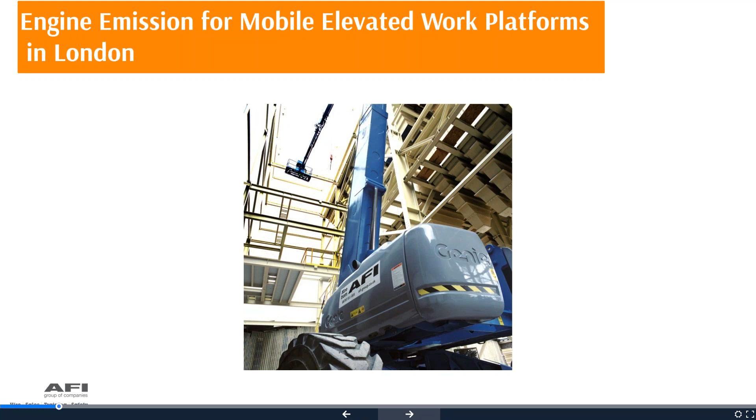So looking at the agenda, we're going to cover NRMM. We're going to look at the scale of the problem, look at some classifications of engines and how you can understand these things. A little bit about breathing, a bit of toxicity, looking at how they affect the body, etc. A little bit of history, looking back at why these things have happened and how it's come to where we are now.

We'll look at NRMM and their website, what's now and in the future, and more importantly how we're going to read an engine plate, because if you are on site in London, certainly in some of the central activity zones or Canary Wharf, you are going to have inspectors looking at your engine plates. And of course there are some machines that we can get an exemption on, so just be mindful of those things too.

So air pollution is one of the most significant challenges facing the City of London. As a major city, London is now in breach of European legal limits for nitrogen dioxide, and many areas are now exceeding safe limits for particulate matter. These limits are set by the World Health Organization. I'll explain NOx and particulate matter later on.

So in order to address this, the Mayor of London and the previous Mayor, Boris Johnson, now Sadiq Khan, have introduced new measures to tackle and reduce emissions from road transport, particularly diesel vehicles, including an expansion of the ultra-low emission zone. You might have heard on the national news last night that the Mayor has now introduced new requirements for vehicles entering the centre of London. This comes with an additional charge imposed on the higher polluting vehicles. So it's clearly going to affect older road-going vehicles and businesses, and equally people in their cars, buses and lorries.

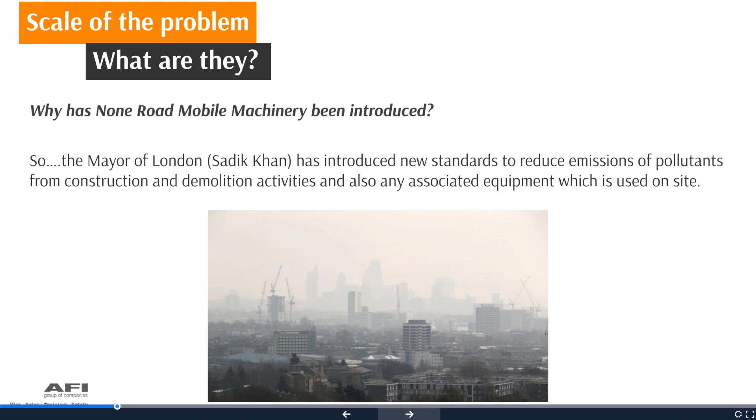So NRMM, non-road mobile machinery. It's defined as any mobile machine, item of transportable industrial equipment or vehicle, with or without bodywork, that is not intended for carrying passengers or goods on the road, and is installed with a combustion engine, either an internal spark ignition (SI) engine, such as a petrol engine, or a compression ignition (CI) engine, for a diesel engine.

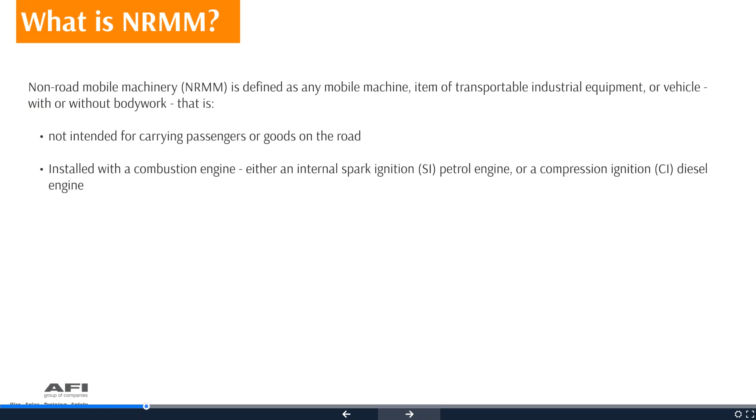So interestingly, this also includes equipment such as excavators, bulldozers, cranes and MEWPs, but these are all dependent on how they're used, and they contribute greatly to air pollution. What they emit is carbon oxides, hydrocarbons, nitrogen oxides and particulate matter. So essentially the EU policy's objective is to progressively reduce the emissions and to phase out all polluting equipment. I'll cover some more examples a little bit later, some that you might not actually realise as well.

So in terms of the engines, they're split into various categories. SI would be a petrol engine and CI would be compression ignition for a diesel engine. But then they're further classified according to the engine's power rating. These categories are then given limits for their emissions output, and they're commonly known as stages. The regulations then tighten the permissible levels of emissions by introducing different dates of compliance for each category and stage, and the rules also distinguish whether the engine is constant or variable speed. So some things to be mindful of.

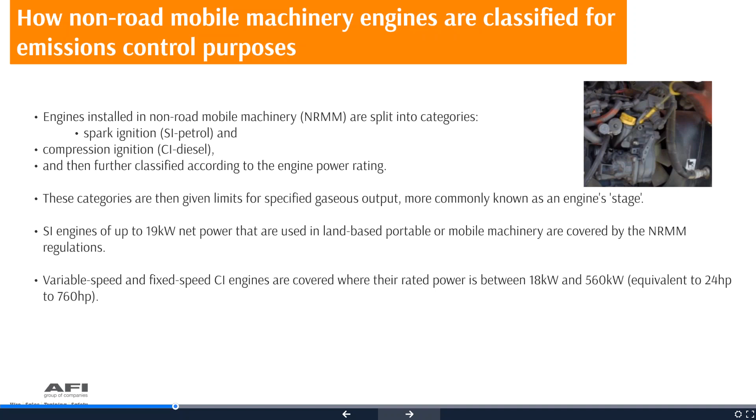So pollution, I think we're all kind of aware of the dangers. Sometimes we don't realise that in certain areas it's certainly worse than others. In Britain alone, pollution is linked to some 40,000 deaths per year. Now, that's every type of pollution. But nearly 9,500 people are thought to die each year in London due to long-term exposure to air pollution. And that's more than twice as many as previously thought.

Nitrogen oxides, or NOx, are poisonous gases derived from nitrogen and oxygen which have been combusted under high pressure and temperatures. So all combustion processes produce oxides of nitrogen. In London, road transport and heating systems are generally the main sources of NOx emissions. NOx is primarily made up of two pollutants, nitric oxide and nitrogen dioxide. Nitrogen dioxide is the most concerning due to its impact on health. Most of the time nitric oxide converts into NO2 in air.

So essentially the important part is to control the emissions, as they can have a direct and indirect effect on human health. Directly, NO2 is known to cause breathing problems, headaches, chronic reduced lung function, eye irritation, loss of appetite, and even corroded teeth. Indirectly, it can affect humans by damaging the ecosystem we rely on, for example water and land, by harming animals and plants.

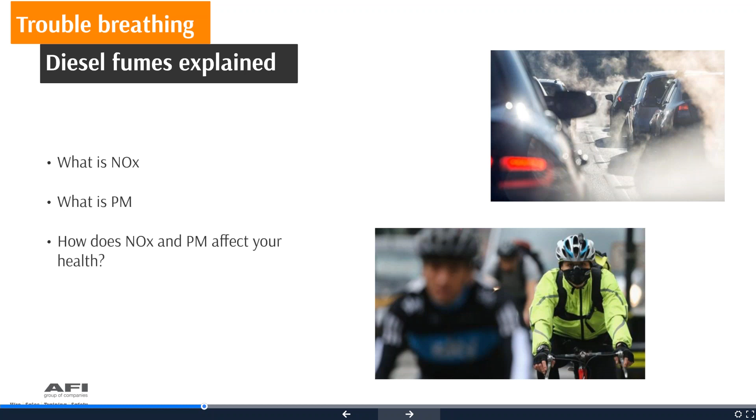So let's look back a little bit of history. Going back well before I was born, 1952, worries about pollution reached a peak with the Great Smog of London. Some of you might remember it, the big smoke. This was a severe air pollution event that affected the British capital of London in December 1952.

A really cold period of weather combined with an anticyclone and windless conditions collected airborne pollutants, mostly from coal and various things like that, forming a thick layer of smog over the city. It lasted for 4 days and then dispersed quickly when the weather changed - the wind got up and blew it away. It caused major disruption by reducing visibility, even penetrating indoor areas, and was far more severe than previous smog events experienced.

Government medical reports in the following week estimated up until the 8th of December, so some 4 or 5 days, that 4,000 people had died as a direct result of the smog, and 100,000 more were made ill, affecting the human respiratory tract. However, more recent research suggests the total number of fatalities was much higher, around about 12,000 people. So 4 years later, 1956, Parliament passed the Clean Air Act to tackle smoke and sulphur dioxide.

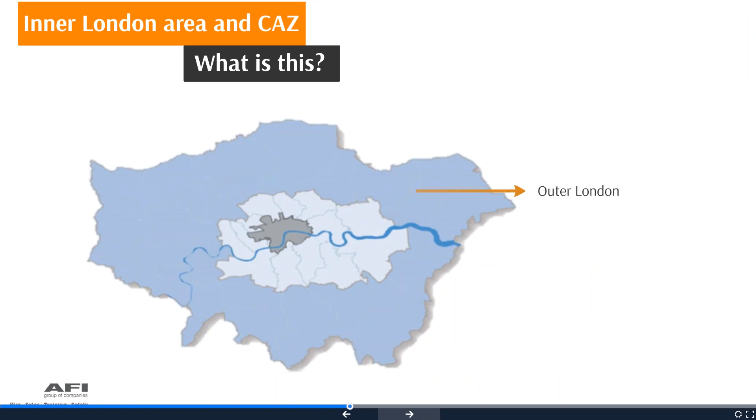Just to give you a bit of context of the area, as you can see there, we've got the Outer London area, the Central Activity Zone, and the Inner London area. The only thing not shown on that one would be Canary Wharf, which would be to the right of the Central Activity Zone. But it's just showing you a picture of that anyway, so hopefully that gives you a bit of scope and context.

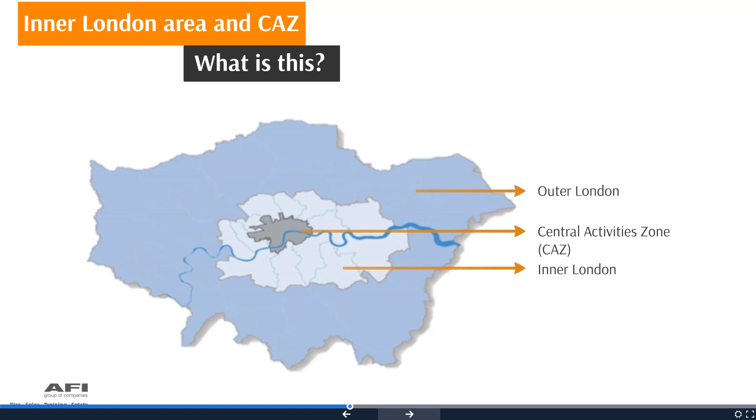So essentially now we're talking about anything in the white or the central dark and grey bit. But like anything, it's going to expand outwards.

So what is required now? From the 1st of September 2015, any major development site - and to quantify what constitutes a major development site - these are defined in the London Plan as residential developments of 10 dwellings or more, or where the number is not given, half a hectare or more, and for all other uses, a floor space of 1,000 square metres or a site area of 1 hectare or more.

Now the site itself, the area, is directly involved with some aspect of that development, and floor space is defined as the sum of floor area with the building measured externally to the external wall faces at each level. So basements, car parks, rooftop plant rooms, the caretaker's flats - anything should be included in the floor space figure.

So as you can see there, it says NRMM used on the site of any major development within Greater London will be required to meet stage 3A of the EU directive. Any development site, similar sort of thing, any non-road mobile machine used on any site within a central activity zone or Canary Wharf will be required to meet stage 3B of the EU directive. So already we've got these requirements, and you should be meeting these at this moment in time.

What's in store for the future? The goalposts are naturally going to change, and it would be remiss of me not to say that you'll need to have your ducks in a row when 2020 arrives, as any honeymoon period they've had is over. From the 1st of September, any development site will require to meet stage 3B, and any within Greater London, and non-road mobile machine used on any site within a central activity zone or Canary Wharf will be required to meet stage 4 of the EU directive. So already they've moved the goalpost one up, and that's what's coming.

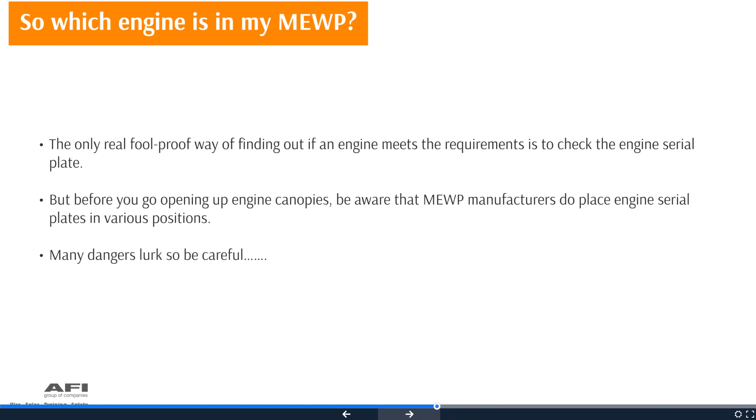So before we go doing that, we need to be aware that MEWP manufacturers do place these serial plates in various positions, and there are dangers lurking, as I'm sure you'll be aware. So you've got to be careful.

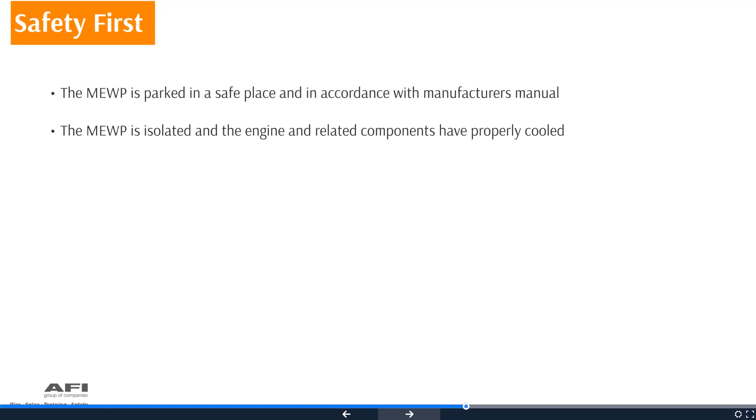This list is not exhaustive, but clearly we've got to make sure it's parked in a safe place, in accordance with the manufacturer's manual. The engine has been isolated, or any power sources have been isolated - I'm saying that because some machines have dual power, so you may have isolated one but the other may still be going - and of course making sure it's properly cooled.

Any parking brakes are engaged. Most MEWPs will tend to brake automatically, however that's not always the case - it may be a truck-mounted MEWP or a van-mounted MEWP, so make sure they're engaged correctly. Any interlocks have been applied, which are either safety or operational interlocks. All emergency stops have been pushed in, and any operating keys have been removed.

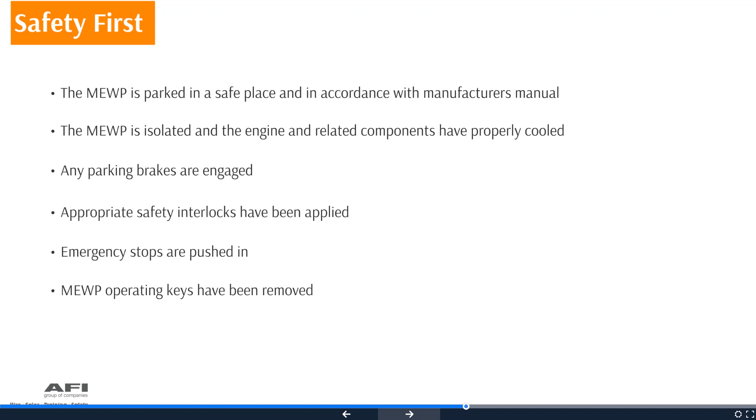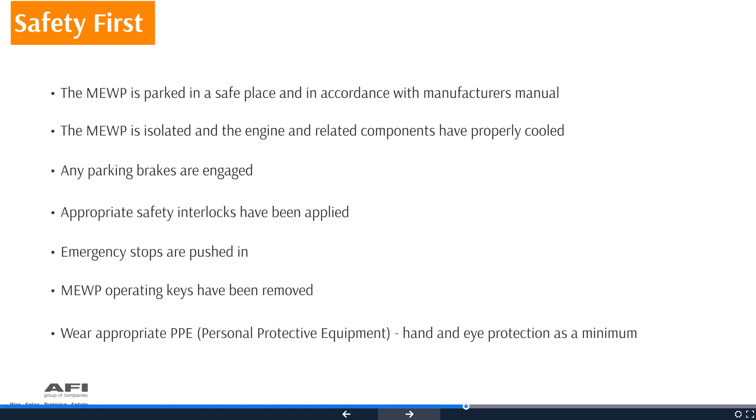And then, of course, you're going to have to wear the appropriate personal protective equipment. We'd be expecting hand and eye protection as a minimum, but that's necessarily going to mean speaking to your safety teams and making sure you're following on-site procedures. So that's my legal thing out of the way straight away - make sure I cover myself there.

Okay, so manufacturers naturally - we've checked our engine over, we've parked our machine correctly - what do we do then? Manufacturers naturally have their own way of meeting the criteria. So many different types of engine: Kubota, Caterpillar, Deutz, all different sorts of engines out there. If we go back a step, these engine serial numbers will be in their technical product information, and there's an example of one there, giving an indication of the engine code structure that you would see on the actual engine.

Now, engines manufactured in compliance with EU engine emissions must be marked with certain information. These markings are commonly located on either an emissions label or an emissions plate. The emissions label can be in different places - it can be on the engine, you can actually find them, sometimes they're in the cab of the vehicle, depending on the type of machine you've got. The engine should be marked by any durable method, so normally it's like a printed plate, but not necessarily.

Just a printed plate, riveted onto some part of the engine, and this is going to include the name of the engine manufacturer and the type approval number. You should familiarise yourself with the location of the engine plate on the MEWP, as this will make it easier and quicker when requested to find it during an inspection.

So you can see an example of the structure of an engine code there. Number 1, is it constant or variable speed? Number 2, what's the emission class? Number 3, EGR - exhaust gas recirculation - so it's telling you if you've got some. It's also talking about some of them having DPF or filters and such.

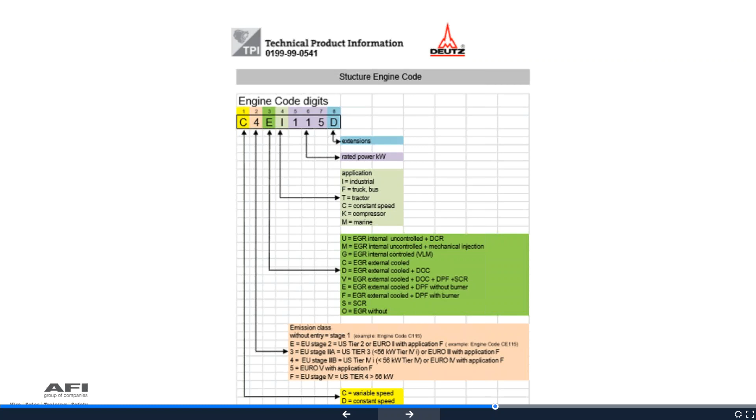Number 4 is the application of the machine. Numbers 5, 6 and 7 give an indication of the rated power in kilowatts, and number 8 is some type of extension. You don't need to worry about all of these, but there are some things that will be very important to you shortly.

There is one key digit in the approval number that provides evidence of the emissions level to which the engine was manufactured, and this is generally the method by which surveillance authorities will check the engine. It's explicit evidence telling you when the engine was manufactured, and this is where they will pull up, ask you to open the engine canopy, and find that digit. There's then a second digit that can be used to identify whether the engine is type approved for variable or constant speed operation.

This photo was taken from a JLG boom machine and shows the location of the power rating and the E1 number. You can see the E1 number straight in the middle, and the power rating up on the top left. That particular machine is 46 kilowatts with a horsepower of 62.

From these numbers, we can see the engine has a power rating of 46, so we'll need to comply with the local LEZ. The E1 number shows the engine is rated as category 3A, a variable speed engine, which complies with the GLA NRMM except for the Central Activity Zone and Canary Wharf. So we'd be able to take this in the Greater London area, but not in the Central Activity Zone or Canary Wharf.

The second digit is important because constant speed engine regulations in the EU are currently limited to stage 3A. Stage 3B and stage 4 constant speed engines do not yet exist. This is technology that will be moving forward.

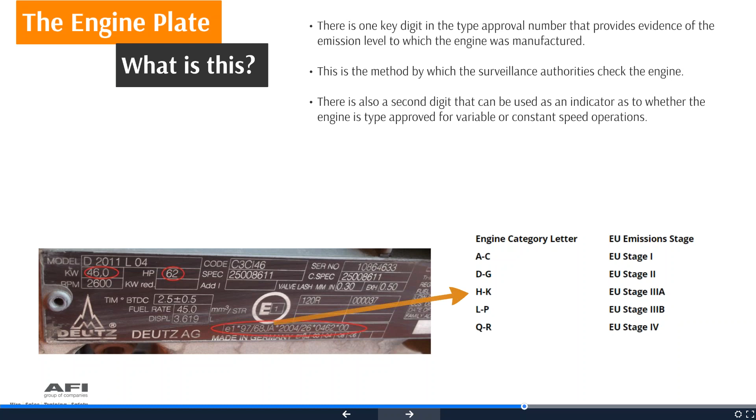In terms of the power rating, you can see it there, and if you're looking at all that thinking 'where am I going to look here' - importantly, if you look at the red line at the very bottom, you can see the letter J. If we take what I mentioned earlier, you can see it's between H and K - it's a stage 3A machine. Hopefully you've got that and understand it.

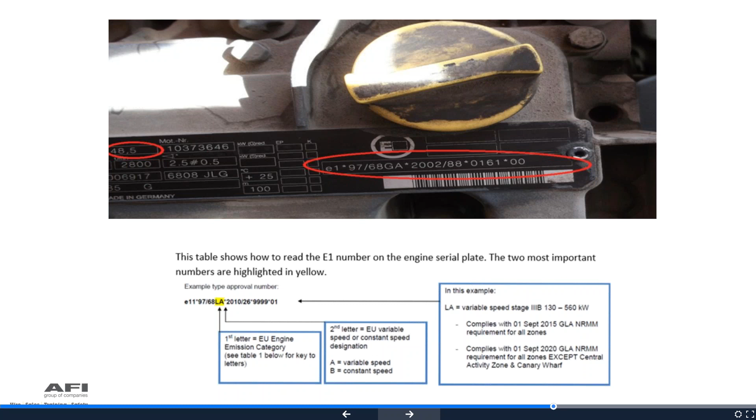When you get onto the website I showed you earlier, there's a common list of things that are preferred - for example, the machinery manufacturer, the engine manufacturer, the engine details. It's limited, so it cannot be in the future, and should be the year of the engine manufacturer, not the year of the vehicle manufacturer, which can actually be different. Engines can be made well before the vehicle is made. So if you're unsure, the engine plate would then provide you this.

The engine power is recorded in kilowatts, and the plant ID is an entry for use by the site, so they can keep track of what machines have been entered onto the system. Generally it will be used by inspecting officers when checking the register against what is on site. In our instance, from a MEWP rental company, it will be a unique fleet number.

But if you had a wheeled excavator on site, it could be the license plate on the back of the vehicle. The engine EU type approval number, as I mentioned earlier, is found on the engine plate, and as mentioned, it is the only really reliable definition of what stage the engine complies with. You must fill that in without any spaces, and the example one that I've shown you there should only act as a guide.

Occasionally, the engine number will have been incorrectly printed, or an engine may not have one. So it could be, for example, an agricultural machine. The system will accept whatever you enter into the form, but entries that do not appear valid will then be flagged, and you are then going to have to give further information.

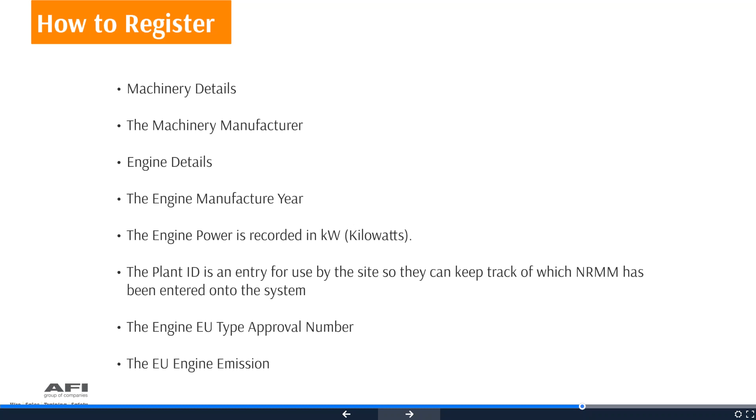So there are some machines that are exempt, and in summary, generally speaking, machines with engines that have a net power between 37 kilowatts and 560 kilowatts will be required to meet the standard. However, there are MEWPs fitted with an engine which is lower than this, and therefore will not be affected. So anything that's got 37 kilowatts or below is going to be exempt. You can see with modern buildings being designed taller, they're going to rely on larger equipment. So some MEWPs will fall into the category above 37 kilowatts.

Now you can see there, any model of MEWP which currently has a stage 3A or 3B engine available. A MEWP which is in limited supply. There are some kit out there that you're not going to get. There's no other piece of equipment in the industry that will do it. So that will be a limited type of machine.

Or equally, a MEWP which is used intermittently, or for up to 30 days. So you might use it every now and again. These are machines that are typically used for up to 30 days. So if you've got a machine on site for 10 days, or 5 days could be a typical hire, and the machine's off hired, you may have a reason for exemption.

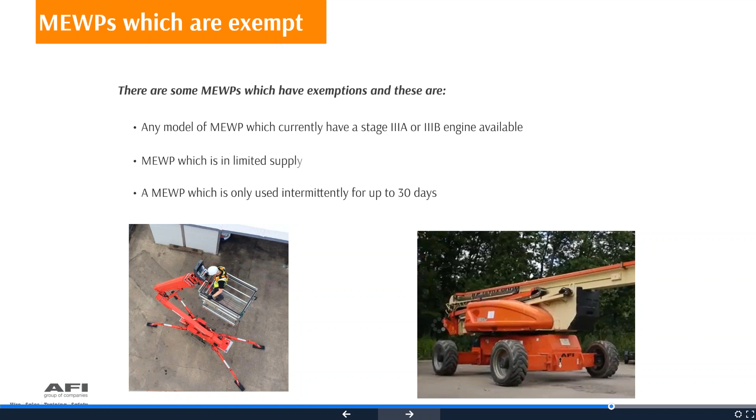What if your machine doesn't meet the standards? There are a number of options available to comply with the NRMM policy. You could reorganize your fleet. We've had to do this; clearly we've been on this for a while. So only the equipment that's in London would then be meeting the requirements.

You could replace equipment with new or second-hand equipment which will meet the policy. Retrofit abatement technologies, putting different types of retrofitting on the machines. You could re-engine. If you re-engine, you've got to be mindful of the type of engine that you re-engine with, or if not, like I said, you can apply for exemptions.

So key messages are potentially that there is not currently sufficient quantity of compliant MEWPs in the UK supply chain for this task. However, it meets the next best available EU stages. So that's a key message out there. Retrofit may be unviable; you may not be able to fit it. When we think of retrofitting equipment, sometimes these machines were not designed to be retrofitted. And sometimes you may find that you actually get a higher engine emission standard because of this.

The most common method of retrofitting involves the installation of a diesel particulate filter, sometimes known as a DPF, or a catalytic converter to the exhaust system of the equipment. All diesel engines are potentially suitable for retrofit, and this would mitigate particulate emissions, but space within the engine compartment and costs may be limiting factors. There may also be several main exhaust treatment technologies available to retrofit, and selection is normally based on the scale of reduction required and the available budget. So you've got to be mindful that there are issues there.

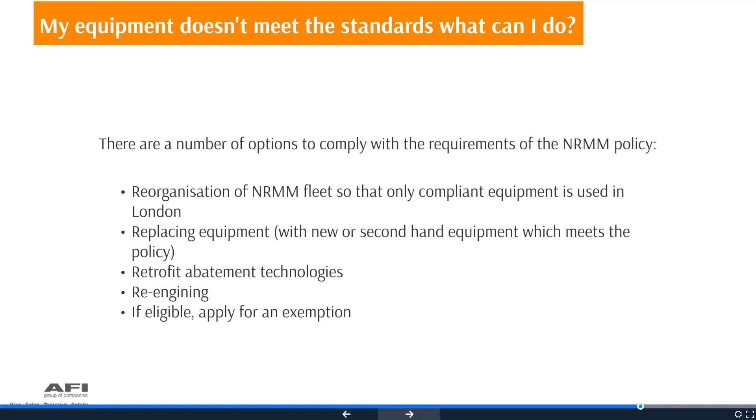So to regenerate the DPF, this would need more fuel, resulting in increased daily emissions. So essentially you're chucking more fuel into the machine to try and get the exhaust temperatures hot enough to get the filter to work. So it's kind of chicken and egg there. Also, some of the very low duty cycles and exhaust gas temperatures that we experience on the smaller MEWPs will not meet these requirements without having a bespoke solution created. So just be mindful of that.

So what IPAF did, the International Powered Access Federation UK Country Council, recognised that we had an issue on this coming, and they engaged with UK members to draw up a viability exemption request for MEWPs to ensure that MEWPs are available for construction projects. Now this is available from the IPAF website.

So as you can see, there's various things in there. You're going to put in your machine type, the manufacturer, the engine manufacturer, the year it was made, plant ID, as I mentioned earlier, like a company hire name, unique fleet number, the engine EU type approval number, what the power is, if there's a retrofit available, the EU emission stage, and then the level of exemptions already filled in there for your viability. You would put that together and send that out to NRMM to see if they would exempt the machine from use.

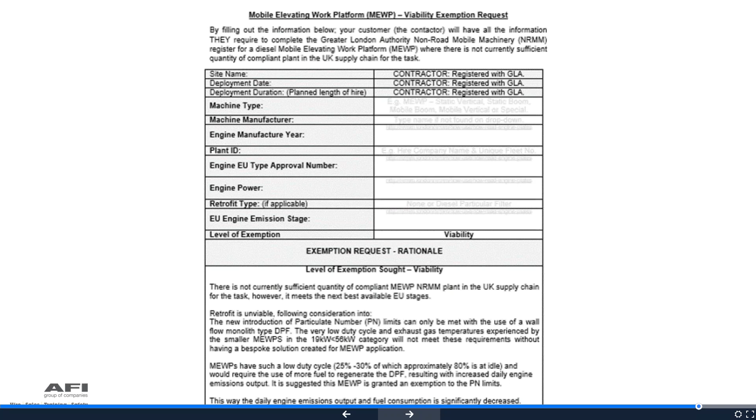Okay, thanks for listening. I have got a couple of questions. Robert's asked, what other machines are affected? Right, and I did mention this earlier. Thanks, Robert, for reminding me. When you look into the NRMM, there are a number of machines that are affected. For example, generators, forklifts, which are industrial or rough terrain, even some pumps that are relying on a diesel engine. And one that surprised me was even garden equipment such as hedge trimmers or chainsaws. They will be affected. So be mindful of that too.

Okay, Chloe's just asked, I have to read this off a very small screen, will manufacturers be fitting stage 4 engines to new MEWPs? Thanks Chloe, this was a question that was raised not too long ago at one of the Strategic Forum Plant Safety groups, and there's a lot of contractors around the table, and equally a lot of manufacturers' representatives, and of course one of the things that we're wanting to do is get the best engines in the machines, the more efficient engines, and the less polluting engines.